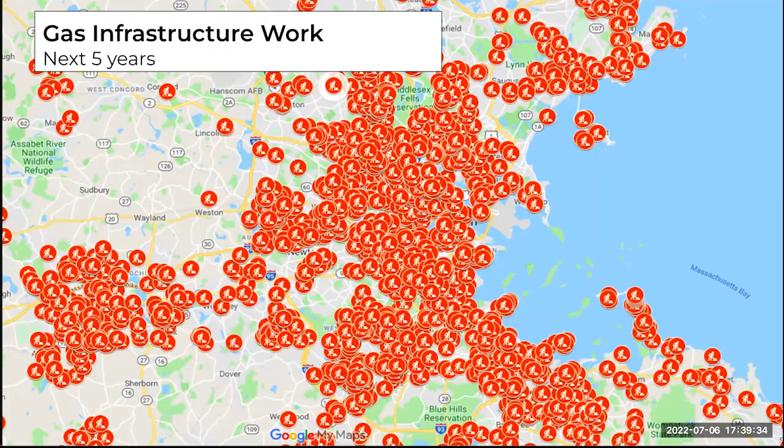Here are the next 5 years of gas infrastructure work sites, as reported by Massachusetts utilities. That's a lot. Over the next 2 decades, the total cost of this infrastructure will be greater than the cost of all the pipes in the ground now in their depreciated state. That's sort of crazy, especially when there's a regulatory docket that asks, how can gas possibly meet the state's net zero emissions mandate? HEET thinks that the NetGeo system might be the answer.

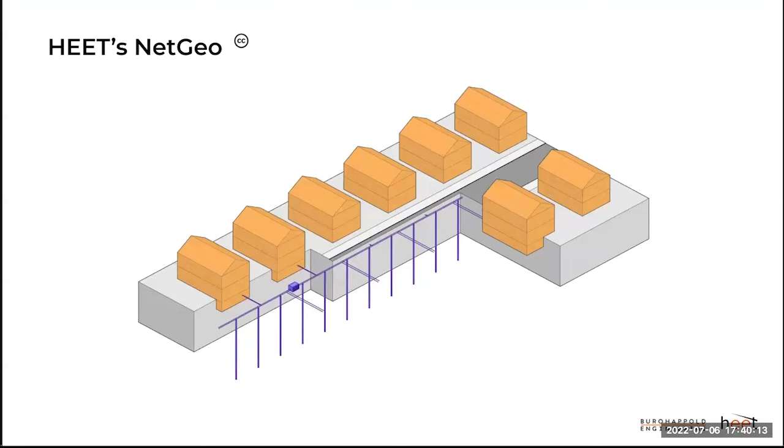It's a street segment network of ground source heat pumps. Like the gas system, the pipes are in the street with service loops going to each building. There are closed boreholes attached going down just a few hundred feet. The pipes are filled with plain ambient temperature water. Heat pumps in each building pull off the heating or cooling that building needs from the water. Gas utilities have the customers, the right-of-way in the street, and the financing methods to get this done.

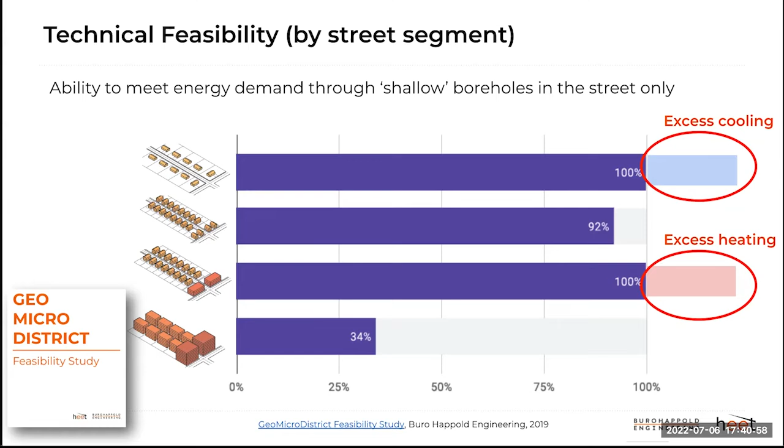We had Buro Happold Engineering, the engineers for New York City's 80 by 50 plan, create a Massachusetts feasibility study. They found the system with boreholes 500 feet deep, spaced every 20 feet down the street in the gas company's right-of-way, could meet 100% of the energy demand of most of our gas territory. In the dense part of cities, we'd have to add supplemental heat, make the boreholes deeper, interconnect the segments to pump the excess energy produced into the cities where it's needed.

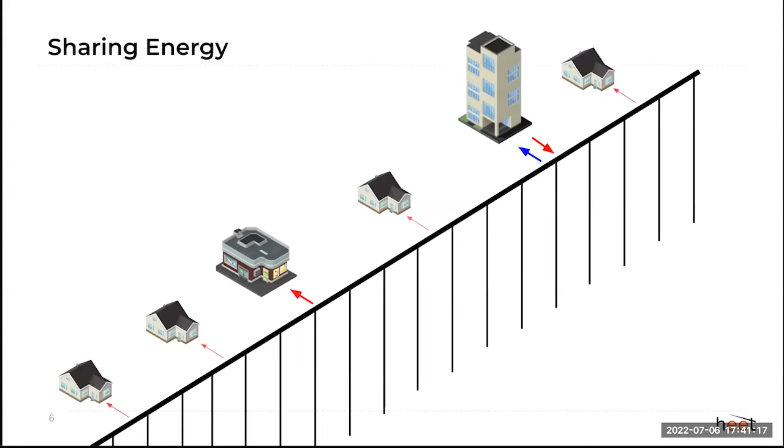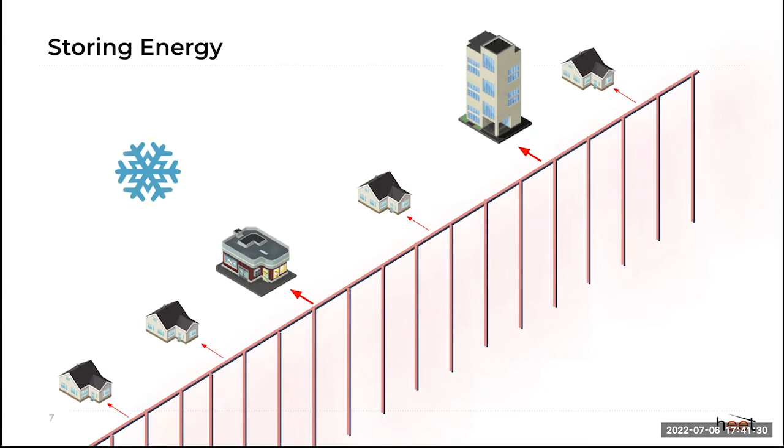Networked heat pumps have advantages. Imagine an office building with the heat from its computers humming all the way through the winter. It's going to be rejecting heat into that shared loop of water, making the water hotter. That heat can then be used by homes down the street. Secondly, excess energy, for instance, heat in the middle of the summer, can be stored in the ground until it's needed months later in the winter.

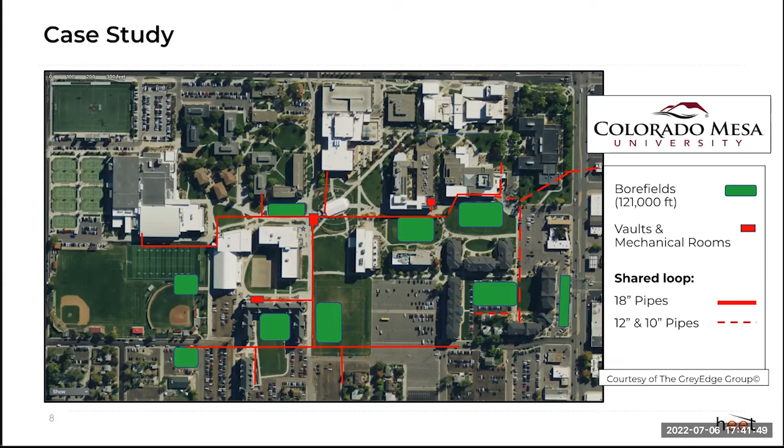Colorado Mesa University has a system like this that serves over 1 million square feet of buildings. Their gas backup boilers, intended to restore the temperature of the water in the loop if it ever gets too cold, have not had to fire for over 12 years.

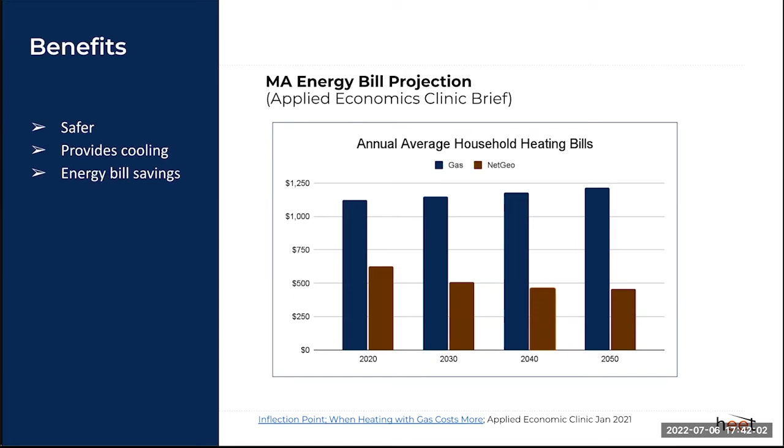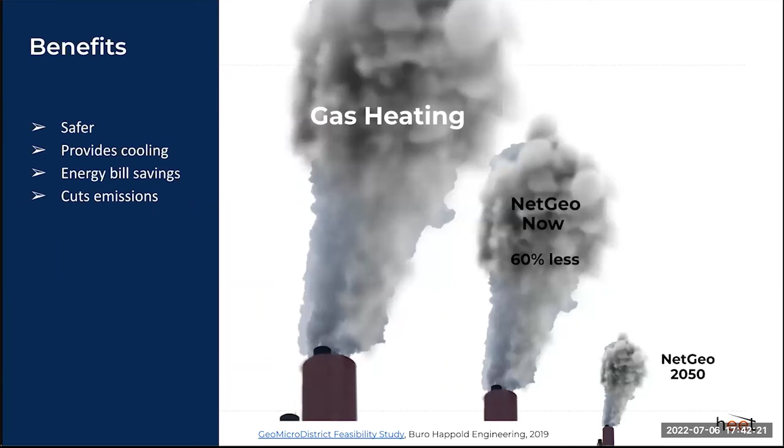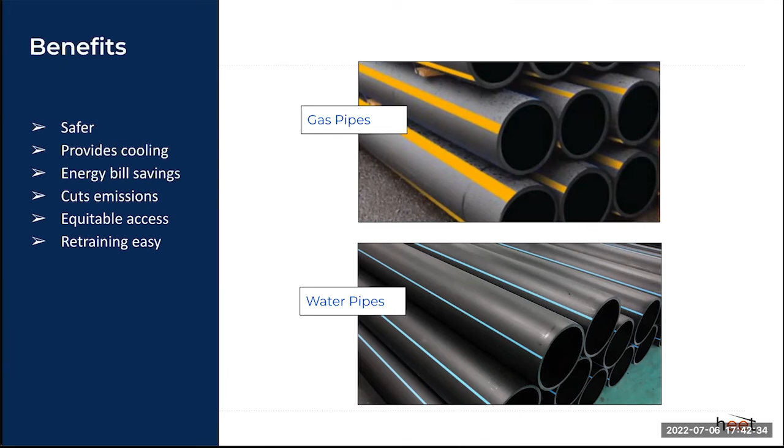So what are the benefits? It's safer than gas. It provides cooling. According to the Applied Economics Clinic, it might even be cheaper too if financed by gas utilities in their normal way. And given our Massachusetts electric grid fuel mix, any building connected to the system would reduce its emissions about 60% in comparison to gas. As our electric grid moves to renewables, those emissions will continue to decline. Since the water pipe running up and down the street is the same type as gas, workers can easily retrain, keeping their benefits and wages.

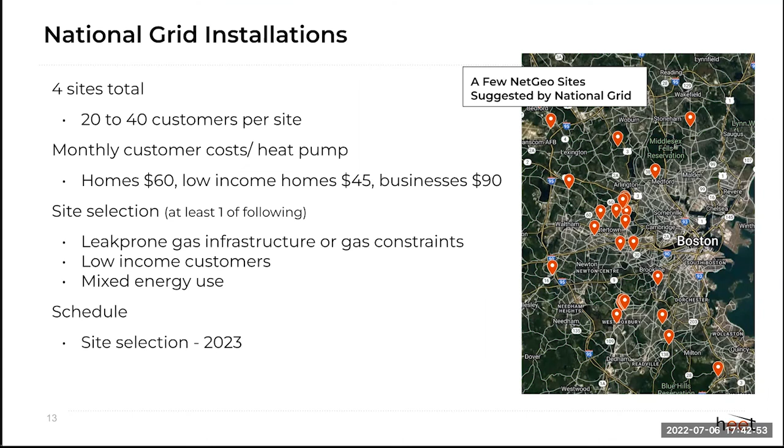I'm excited to say regulators have approved Eversource to install a demonstration of the system in Framingham. It'll go in this fall. National Grid has 4 installations approved. With their installs, they will replace all gas appliances with electric ones. This is a gas utility performing electrification. Outside of Massachusetts, other installations are happening.

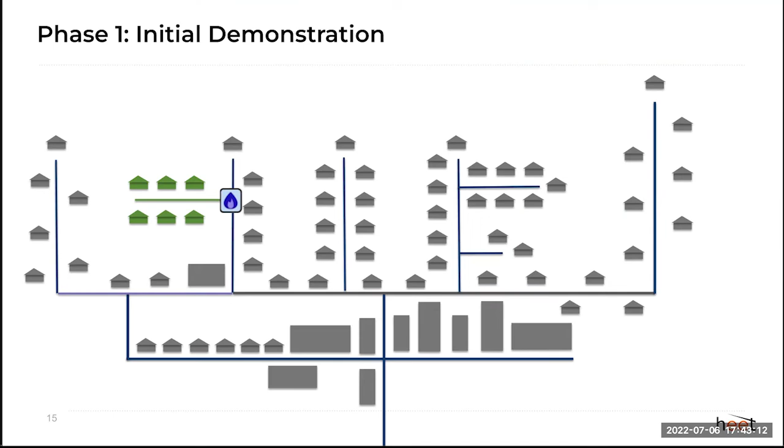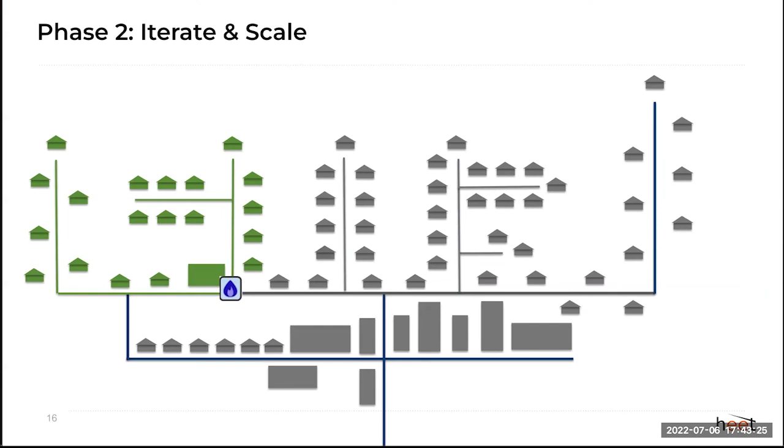So the first installation could go on the distal end of a system. There could be a single gas heater at the end of the street, providing supplemental backup heat if ever needed, which we know is not likely. Then additional street segments can be added and interconnected, backing the gas heater up further away, until gas is only needed at the very center of urban areas.

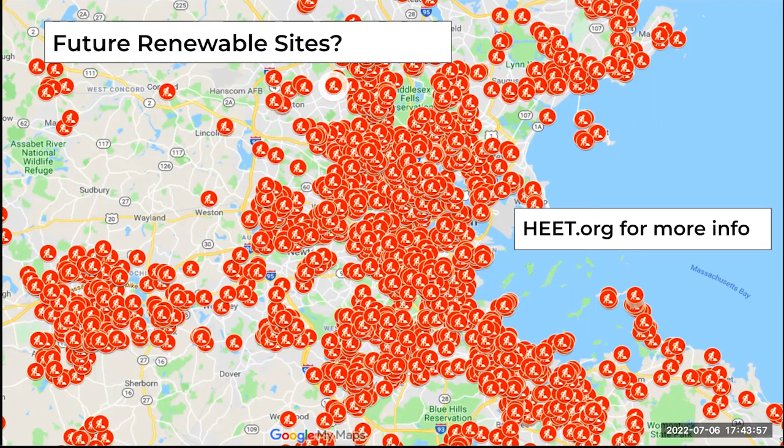In order to ensure we scale rapidly, HEET has a research team with Harvard, MIT, and 2 national labs. It will make the data transparent, analyze the results, and learn best practices. If we're successful, all of these potential fossil fuel installations could instead become seed sites for the NetGeo system to grow out from, moving all of us to safer, lower cost, more equitable energy.